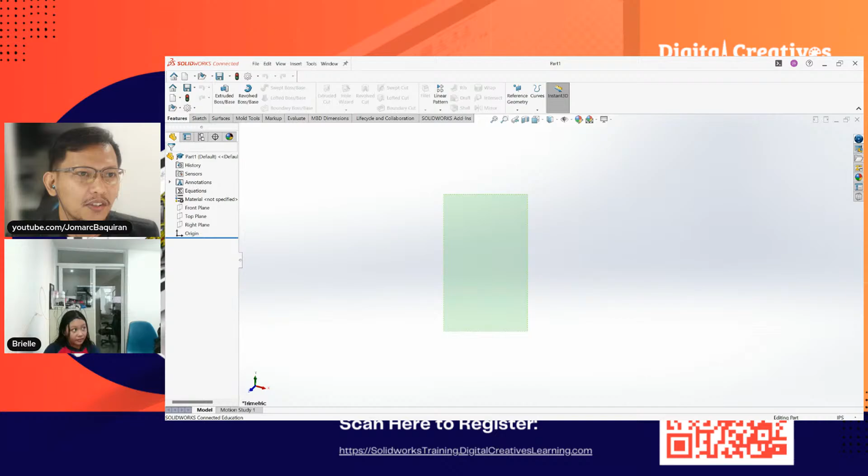And the first model that we are going to do is, so let's warm things up. In addition, I have here Brielle with me, an 11-year-old who is also learning SolidWorks. Oh, I can see Brielle's screen. So this is Brielle's screen. Okay, and the first challenge, flashing over the screen, is this. And suggesting you use millimeter or inch, IPS, inch pound second units.

Okay, as a recap, I'm going to hit Control and double click on part. Yes. I cannot see the dimensions. Once more, showing you the challenge. I forgot the mic is on. Okay, so to change the units, simply head to the lower right. So from here, MMGS, changing this to IPS, inch pound second.

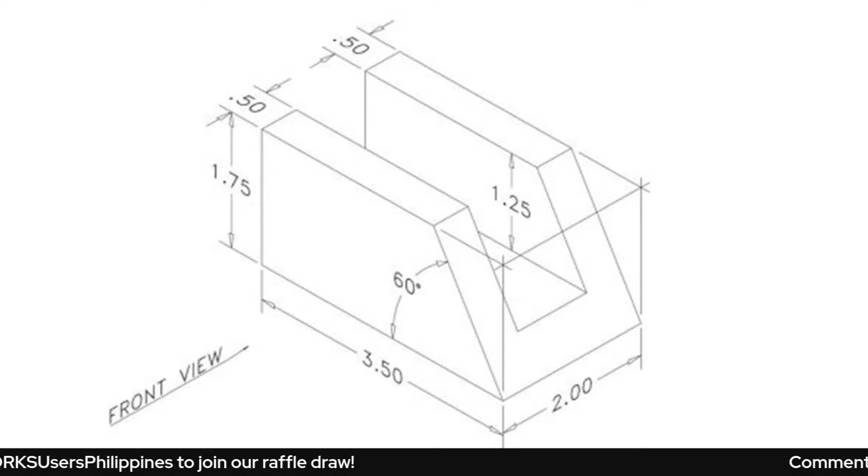Let's see what Brielle's been up to. Okay. So my interpretation on this would be hitting L again for line, selecting front plane. And again, with regards to our definition of sketching, it's rapidly drawing something. So I'm gonna quickly draw this form. Okay. So again, flashing the challenge, requesting everyone to follow along.

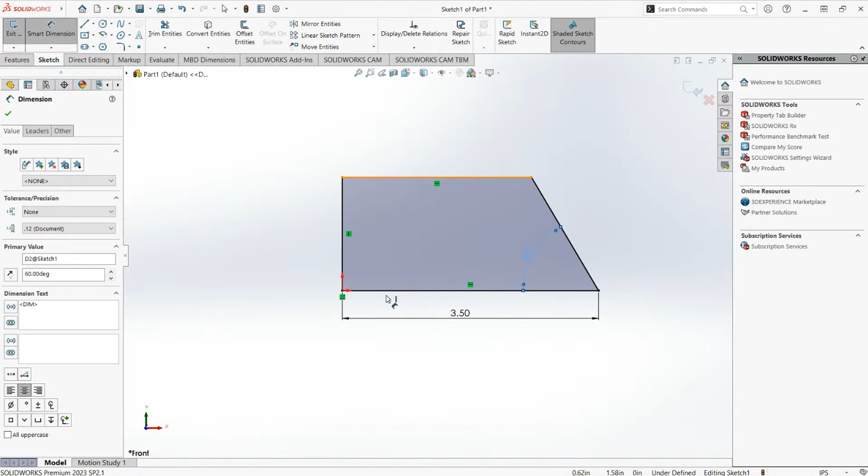Okay, so we're just warming things up. Later, we will be having, I guess, a much more complicated part. Oh, Brielle is already done. So again, it's completely black, which means this is fully defined. Exiting out of the sketch. I have selected extrude boss base, contour selected, and of course, again, make it a habit of making things symmetrical, so changing the direction to mid plane.

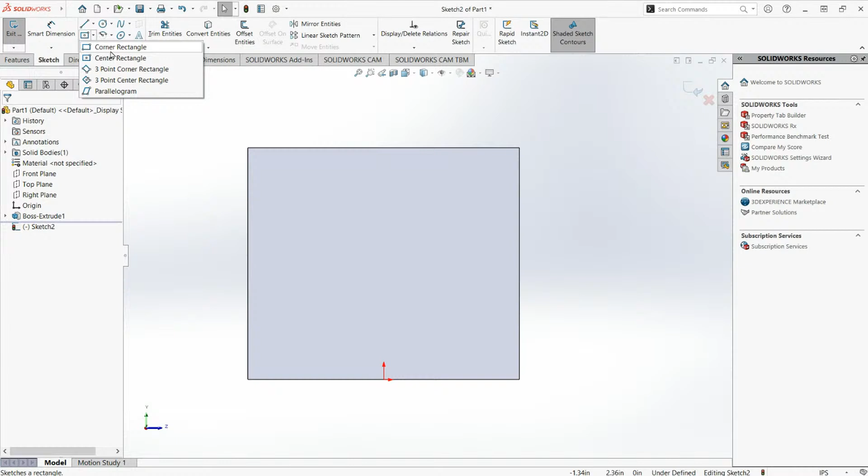Okay. Typing in, revolving our model, selecting this face. I'm going to sketch on this face. So bringing in our rectangle tool, specifically corner rectangle. Left click here, left click, hit S, and grab our smart dimension. Selecting these two vertical lines, it's 0.5. Selecting these two as well.

And notice right now, this dialog box is currently highlighted. So if this is the case, I can select the other dimension, 0.5, indicating that both of them should be equal. Okay, and finally, placing in our 1.25. Exiting out of the sketch, selecting this edge again, confirm under my lower right it's 1.75.

Heading over to features, selecting extruded cut. Okay, and again for the direction, I prefer through all, and hit the green check mark. Okay, so that's how we can quickly create this first part modeling challenge. Very simple, right? Very simple for Brielle as well. This is her work.

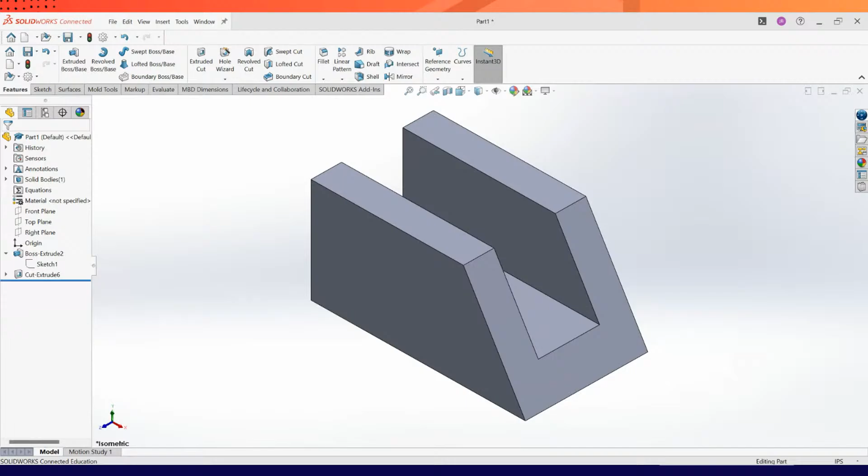Okay, next challenge. So the next challenge would be this one. So this time the units are in millimeter, gram, second.

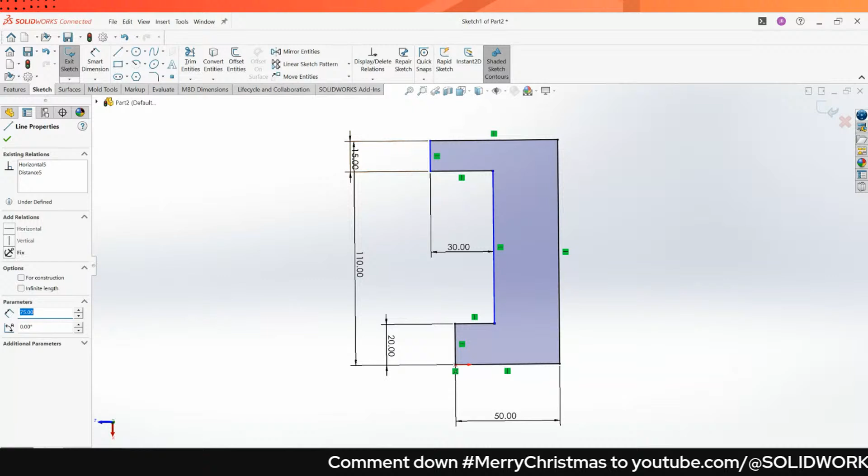Okay, checking Brielle's work. So for Brielle, she needs to add, of course, the rest of the dimensions. So A is 110. And I'm seeing, yeah, that's a good practice. Always move the entities to check what needs to be applied. Is it a relation or a dimension? So move it again, Brielle.

So from here, I'm seeing you should apply collinear. Okay, so you got it now. So exit out of the sketch. The height B is 60. Control 7, isometric view.

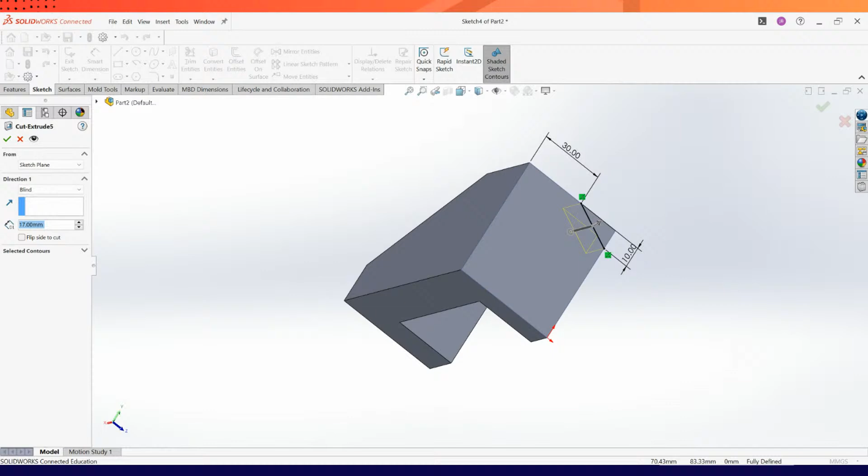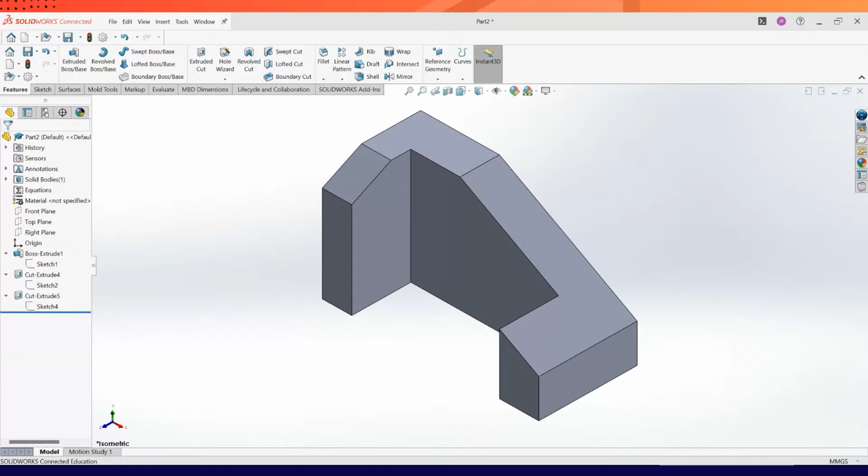So next, for our third challenge, how about this one? Oh my god, what is that? Okay, so control N. So let's assume this is also in inch, pound, second. Where do I start from? I don't know. Of course, what I will do for this is I'll be creating this profile. So my turn, control N. So changing this again to inch, pound, second.

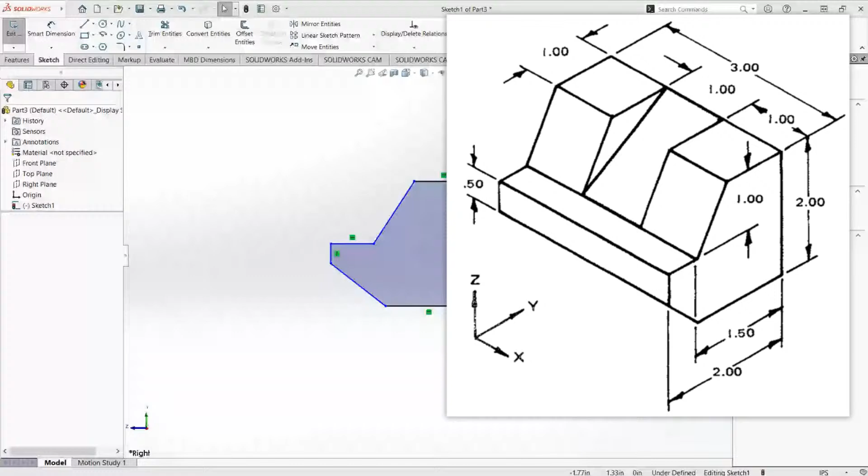So checking Brielle's work. Yep, I think she nailed it. I think for mine, these two points should be aligned vertically, right? To 1.5.

Okay, Brielle has a question. It's actually this one should be 0.5. It's not a sharp... Oh, okay, like what you did. Never mind then. I need this. How about yours?

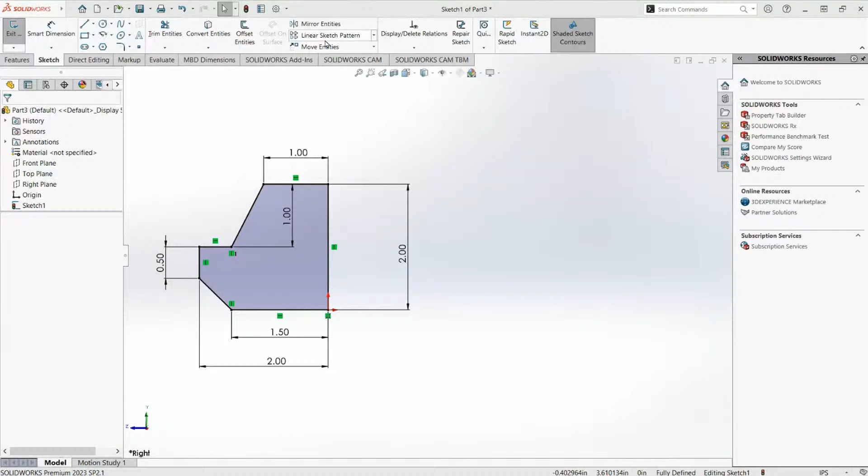Yeah, so if you can see my work, this one, Brielle, these 2 points, I aligned them to 1.5. So I selected the 2 points.

So Brielle's done. So it's 3. So for the direction, again, our practice, making things symmetrical. So mid-plane. Did you extrude that mid-plane? I did not extrude it. You should extrude. So go back to boss extrude. No, boss extrude. Right click. Cancel that. Yeah, mid-plane. The direction. And then type in 3.

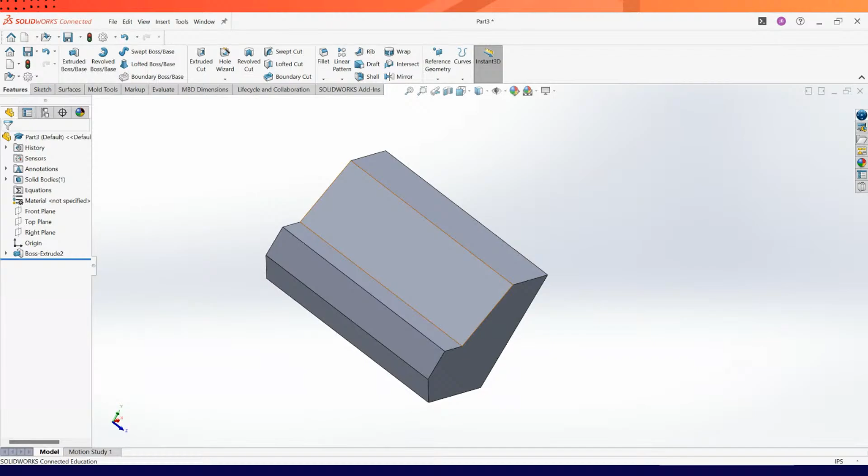Okay, to check if you actually select the edge, Brielle. Any edge. Edge, not that. To determine if it's 3. There. Okay. What does it say? 3. Okay. So let me catch up with Brielle. Again, direction, mid-plane. 3. Of course, the next challenge is how do you create the cut extrusion at the middle?

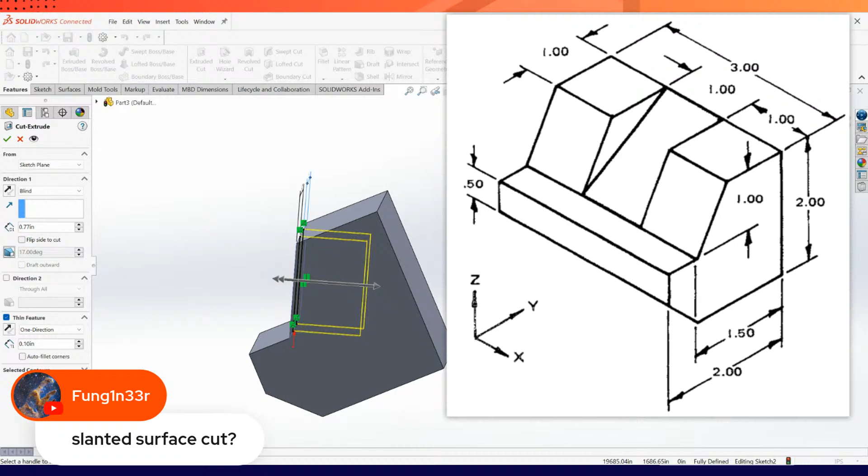Is anyone done from our participants? I'm seeing Brielle is doing, yeah. Brielle is having difficulty. No, I'm not. From Fungineer, is it a slanted surface cut? No, it is. Me. Oh yeah, this is coming from an 11-year-old. Okay. Help me. Oh, Brielle is asking support from our audience.

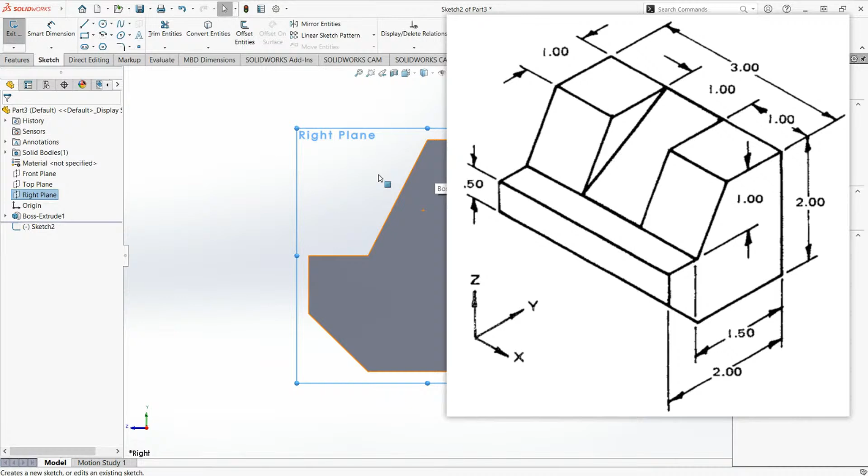So for my interpretation, I'll be sketching the profile or the contour for that cut extrusion. I'll be selecting right plane. Okay, sketching on right plane. So with right plane, I'm going to convert entities. I'm going to create a line from this point all the way here. Actually, no need to convert.

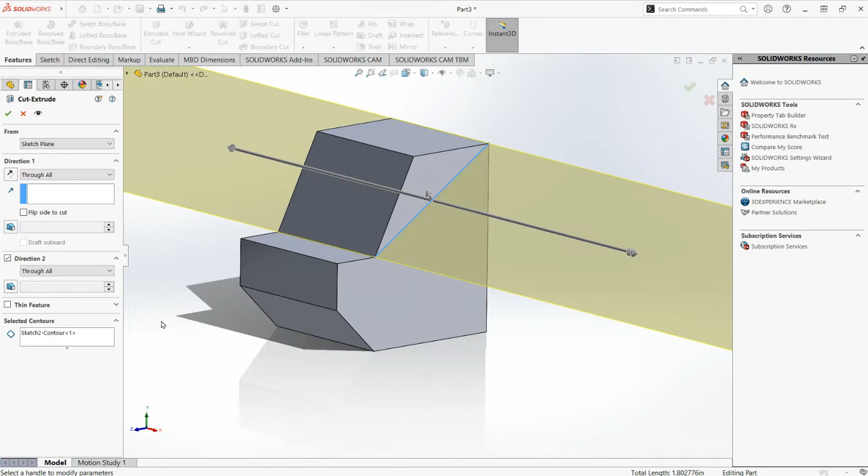So if you want to see the section view, head up here, up in the middle, section view. But of course, you need to select the appropriate plane. So right plane, section view. And of course, from here, we can do the extruded cut. How do you do that? So like what you did previously, I created a diagonal line. This one. And of course, or simply convert the entities.

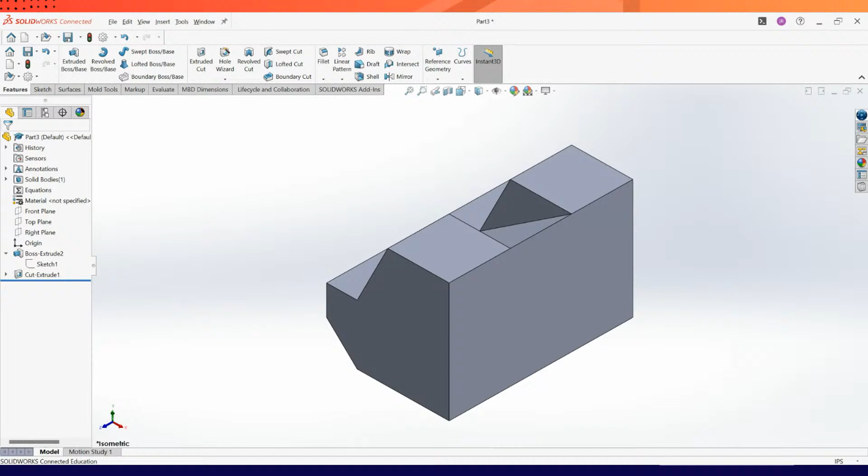Kindly remove the section view. Okay, got it. I think I may have the wrong. Home view, please. Okay. Control 7, home view. Okay, if that is the case, Brielle, how do you make it the same orientation when we view the drawing? It should be like this, right? So again, it will be changing the plane where you sketch on. What if you do Control 7? Yeah, you should have sketched on the right plane.

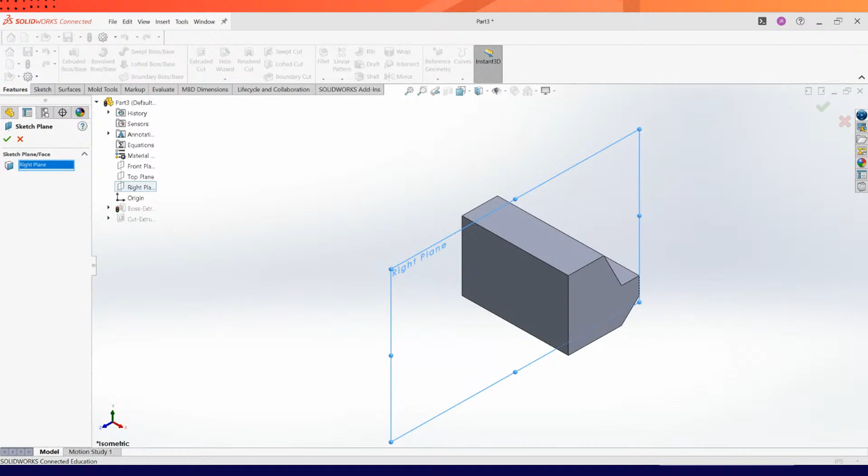So head over, change the plane, go to sketch 1, edit sketch plane. And then, of course, deselect that, select the front. It should be right. Let's check. What does it say? Continue and ignore. Oh, you have to redo.

Anyways, guys, it's just simple. If that occurs, like for mine, so this is my model, removing the section view, of course. So I can, again, edit sketch plane if I prefer this one to be showing, let's say, on the front. Of course, we need to make the necessary adjustments. So got it, Brielle?

Okay, let's now move on to our next exercise, making things more difficult, as they say. But hoping this is a piece of cake for Brielle too, so showing the next challenge. Okay, challenging everyone to create this model. How dare. Yeah, let's view Brielle's screen.

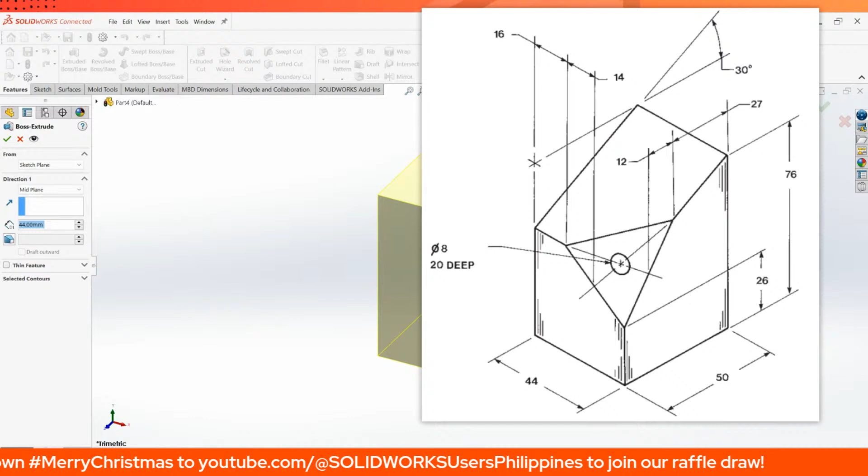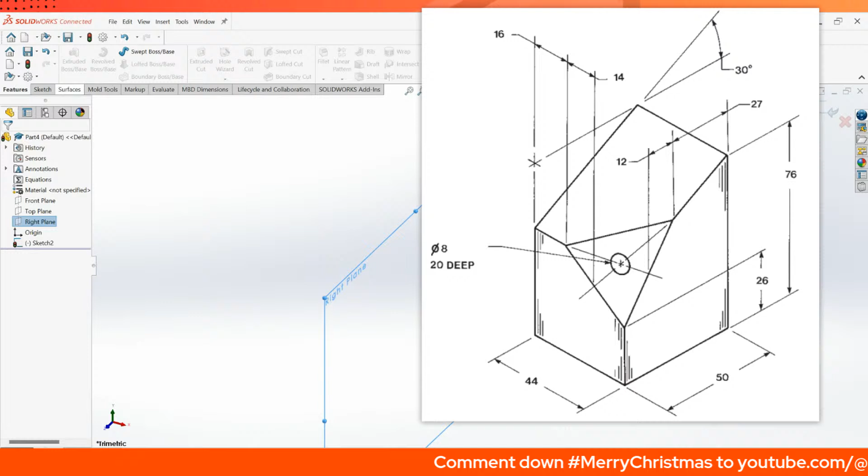Yeah, for this Brielle, I think you should have created the diagonal cut through the sketch right away instead of creating a rectangular extrusion. Yeah, my suggestion for you, Brielle, is to quickly create this type of profile right away. Okay? This is proving to be challenging for 11-year-olds. So it has an angle actually, right? So 30.

I'm gonna grab a quick coffee.

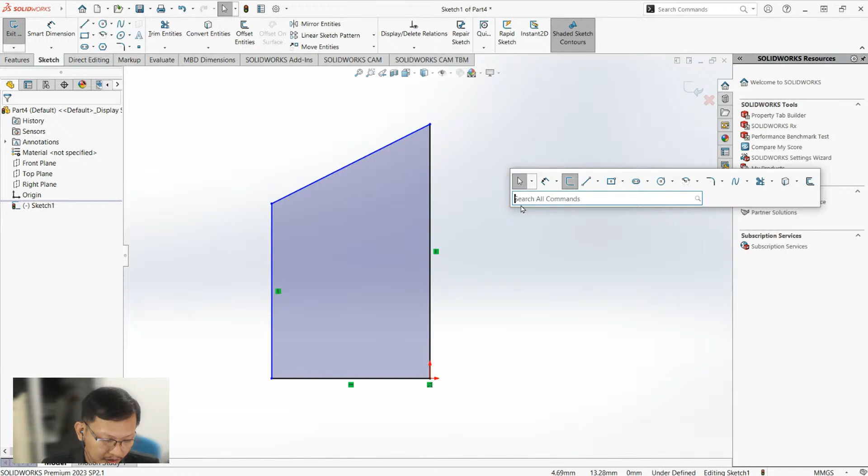Okay, so let me share my screen. All right, so for this challenge, let's first create this section. So this is 76. Are you done with this, Brielle? Yes. So 76. This one to be 50 to 50. And there's an angle here, right?

I'll probably be creating a line here, convert to construction, place a dimension. So it says 30. So this should be 30. 30. So are you done with this as well?

Brielle is showing me another technique, how to add the dimensions. So Brielle, how did you do it? Where did you get that arrow type? From the dimension. Okay. Then,

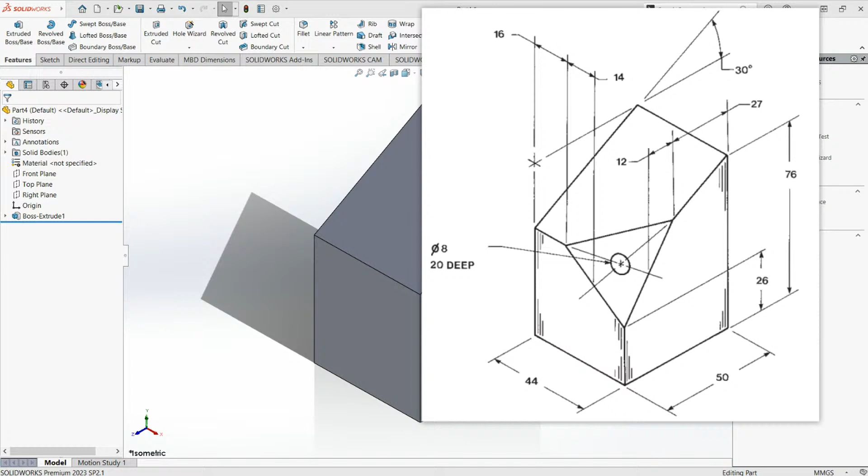Okay, so for the first one, let's define, I'm seeing the 16 and 14. So I'm going to select this face. I'm going to sketch and head up, selecting point. Again, head up, upper left, point. I'm going to drop a point on this edge. Okay? And it says here on our challenge, 16. So grabbing our smart dimension, dimensioning this point to be 16.

So next, I can also add the 26 as well while in sketch mode. So grabbing point once more, point, dropping the point this time on this edge, grabbing smart dimension. Let's define this as 26. Then of course we have another point defined by 27.

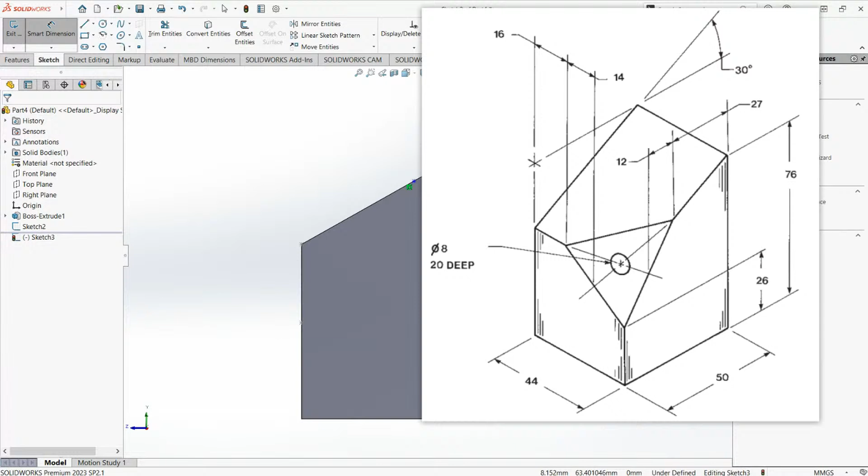So I'm going to exit out of this sketch, select this face. Okay. Grab the point tool, upper left, drop this on this edge, diagonal edge, and define this to be 27. Again here, 27.

So going back, exit out of the sketch, isometric view. So I have now created those 3 points, right? So what should be the next step? Again, showing you the challenge.

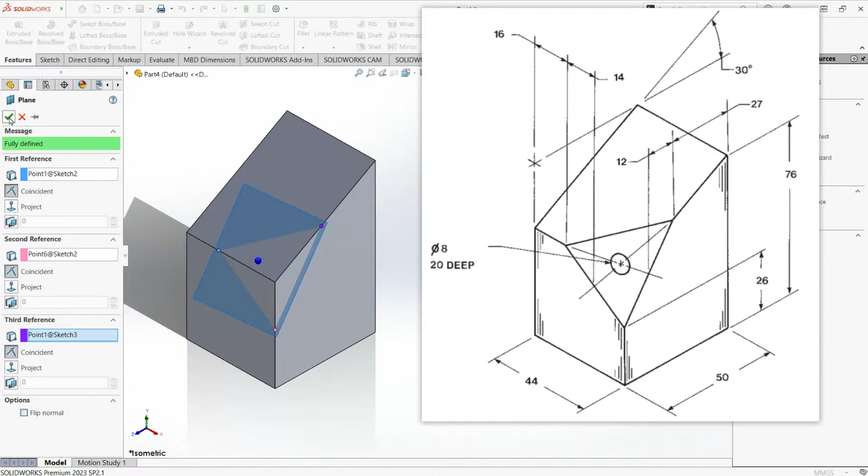Okay, so with the 3 points created, I'm gonna head up again, this time at the upper center, under reference geometry. I'm gonna be selecting plane. So it asks on the left, take note, first reference is currently highlighted, asking us what's our first reference. So I prefer this point. Second reference highlighted, this point. Third reference to be this point. Okay, selecting the green check mark. So we now have created a plane based on 3 points.

Okay, and from these 3 points, next thing I'm going to do is slicing this up using that plane. So head over under the tabs, direct editing. If it's not visible, head anywhere to a blank space. So here I'm in the blank space here on our ribbon. Right click under tabs. I enabled direct editing. So with direct editing, I'm going to be selecting split.

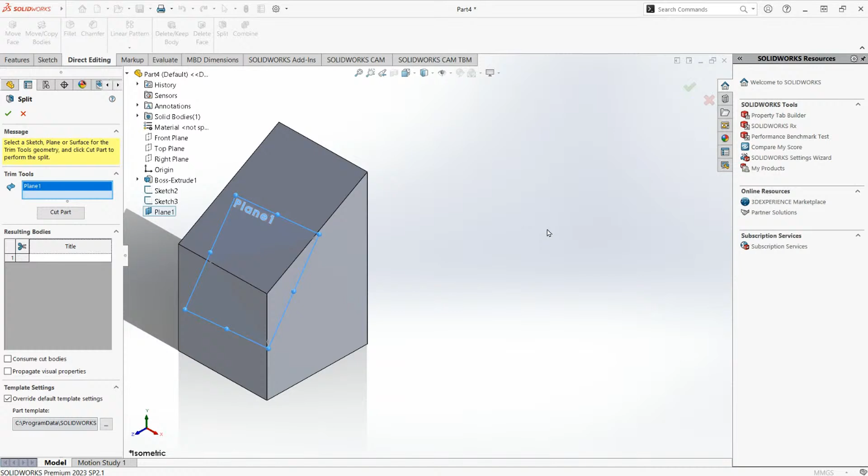So for the trim tool, definitely our trim tool is the plane that we have created. Okay, and selecting cut part. So selecting these check marks, I just prefer to have those bodies existing and not removing them. So checking those check boxes, selecting the green check mark, and notice right now, from a single solid body, we now have 2 bodies.

So for the target body to be removed, I just prefer, for the sake of this lesson, to turn off its visibility. But of course, we can always delete that. Okay, so with the chunk on the edge removed, let's now create again the sketch reference for us to create that circle.

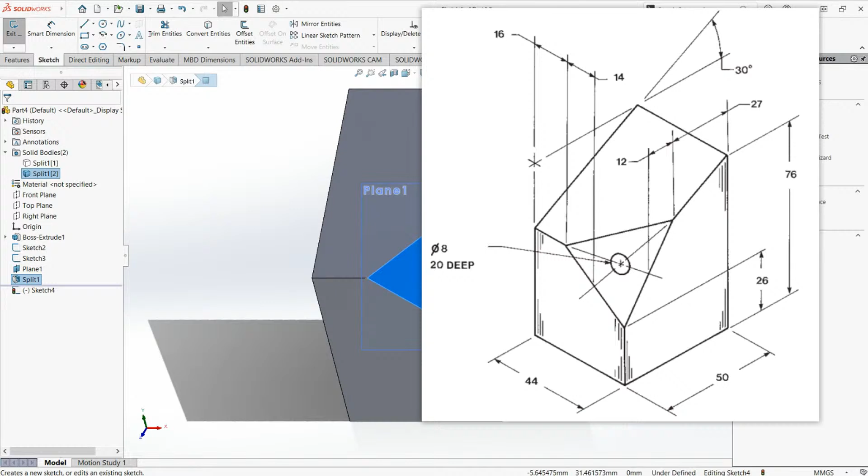So I'm seeing those projected lines projected to the midpoint of the edges to create that circle. So let's now select this face, sketch. I'm going to be creating a line, grabbing line from this point to this midpoint. When you hover over this edge and search for that midpoint, of course it will appear and gets highlighted. So like this one, the orange one, left click. So it's black, which means it's fully defined.

So selecting this line, turning this into a construction geometry. L once more. From this point all the way up to this midpoint, turning this into a construction geometry. So from here, we can now grab our circle tool, dropping my circle here, selecting the center point and this line, selecting coincident, hitting S, selecting smart dimension. The diameter is 8. Okay, so with this now defined, we can now create a cut extrusion with a depth of 20.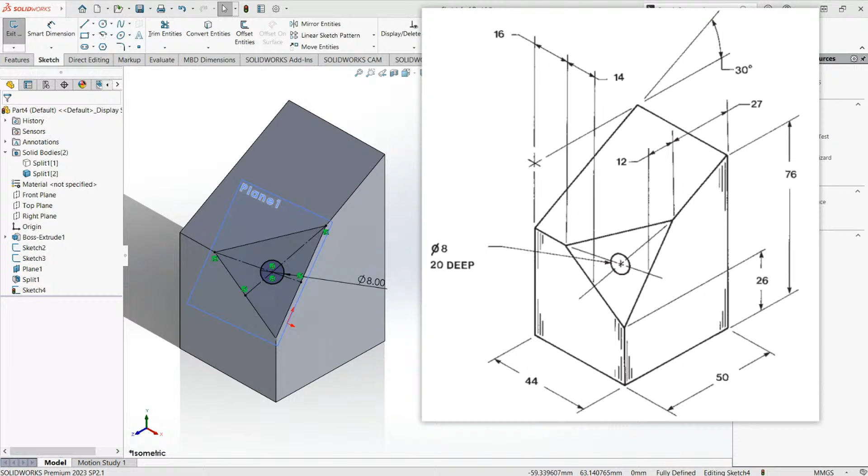Okay, so let's wait for Brielle to finish the task, and for this part modeling training, I would like to leave you with this final challenge. Leaving you this final challenge, and in preparation, please screen capture this. So this time, this one is using convert entities.

Okay, last challenge for the day, Control N. Selecting part. And selecting millimeter gram second. So for me, sketching on the top plane, grabbing circle, diameter for this circle to be 58.

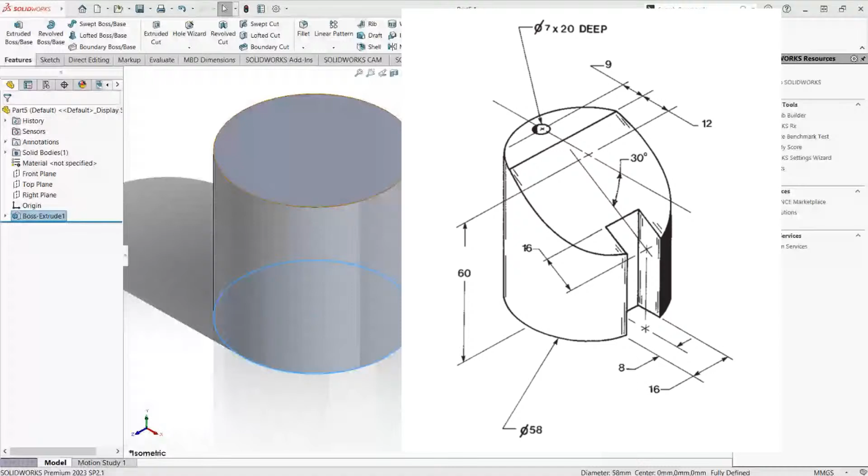So for this, I'm going to sketch on the top of this cylinder. So L for line, creating a sketch from a line from here to here. Of course, making this vertical. Again, relation, vertical, smart dimension, dimensioning this line and our origin. It says on our drawing it has a distance of 12. So with 12,

I'm going to create another sketch, this time on the front plane. And probably create a section view on the front plane. And this time creating a line, again, sketching on the front plane, creating a line from this point.

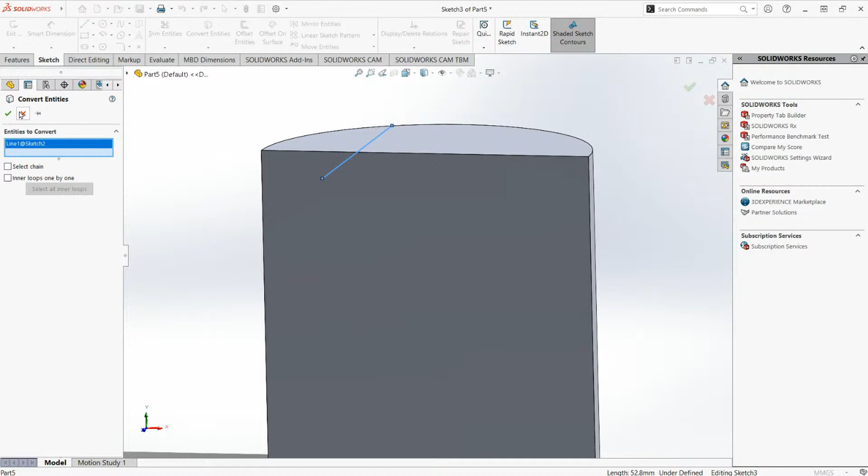But of course, we need to convert this into an entity because our line doesn't attach to that point. So selecting convert entities. Let's convert this entity. Or if not, so we really need to convert this as an entity.

Yes? Let me. Yep, so checking Brielle's work. She has already created that diagonal line.

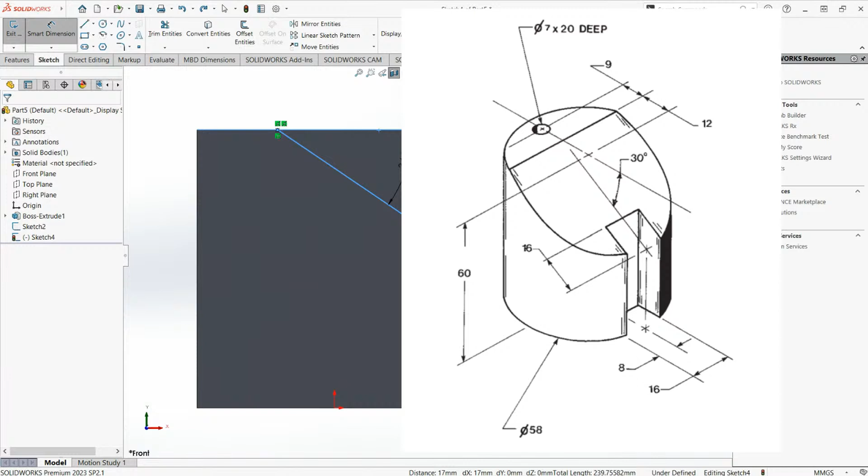And of course, same. We have to convert entities. So for this edge, so showing Brielle's screen. How do you convert this, Brielle?

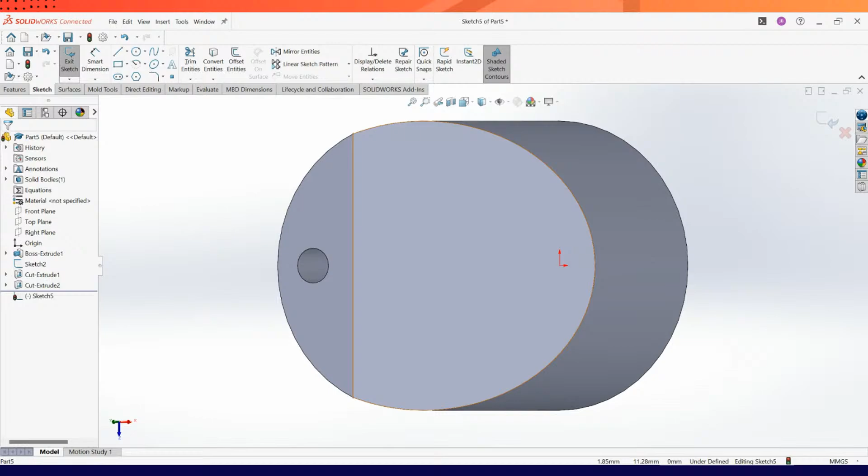So of course, with this line connected, again, let me just repeat. You need to go to normal view. So let me delete this line. Control 8 for normal view, creating that line again from this projected point up to this edge. So notice the coincident relation was automatically applied, applying the dimension, which is 30.

So next, with that diagonal line created, we may now proceed to extruded cut. So selecting this line and the direction, I want you to select through all both. Selecting the green check mark once more, through all both. Okay, next step would be sketching on this plane. I want you to sketch on this plane with that 16 dimension, the dimension having a value of 16.

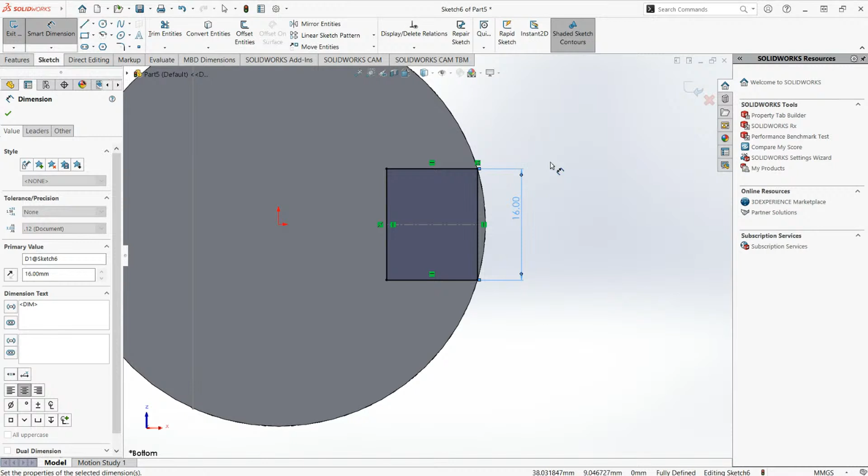And I want this endpoint of that previous sketch aligned midpoint. The relation with this line and this point to be midpoint. And of course, from here, we can now add the dimension having a value of 16. Okay.

So again, guys, when I have created that rectangle, I also utilize convert entities to convert this arc for us to make this as a contour or profile. So let's check Brielle's work.

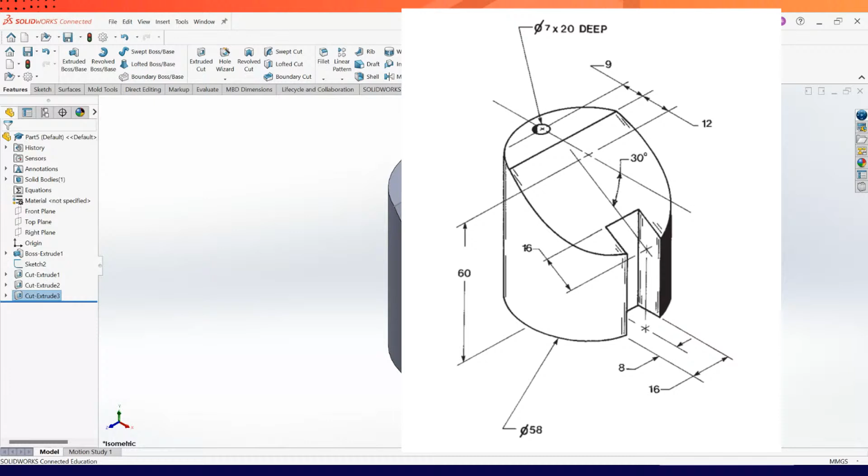Okay, going back to my screen. So again, with this as a profile or contours, from here we can now create a cut extrusion. So selecting extruded cut, selecting sketch 6. So those contours are this rectangle and this piece of segment. And for direction, I prefer through all. And of course, leaving the rest to you, like creating the hole on top of this face.

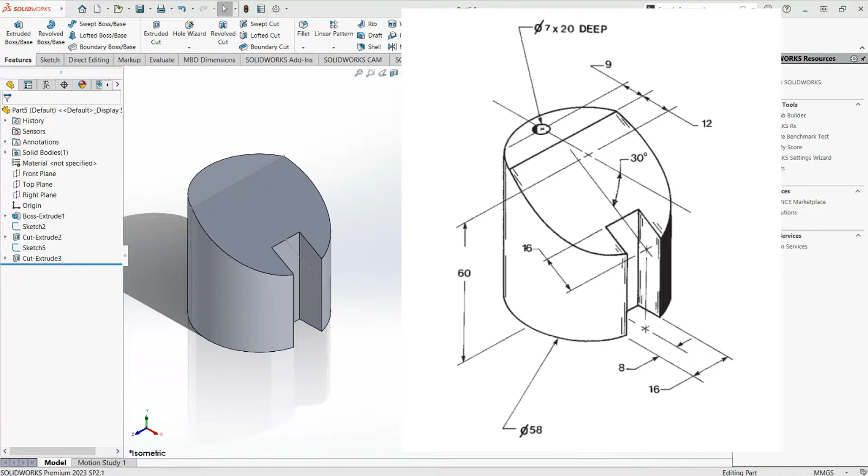Okay, and for our final assignment, I want you to screen capture this. But this time, instead of the special request for this challenge, which I'm gonna be leaving to you, I want you to sketch this out on a single part like this. Again, this is in preparation for our assembly class. I want you to sketch this out like this. Your assignment. I want you to sketch this out in a single sketch.

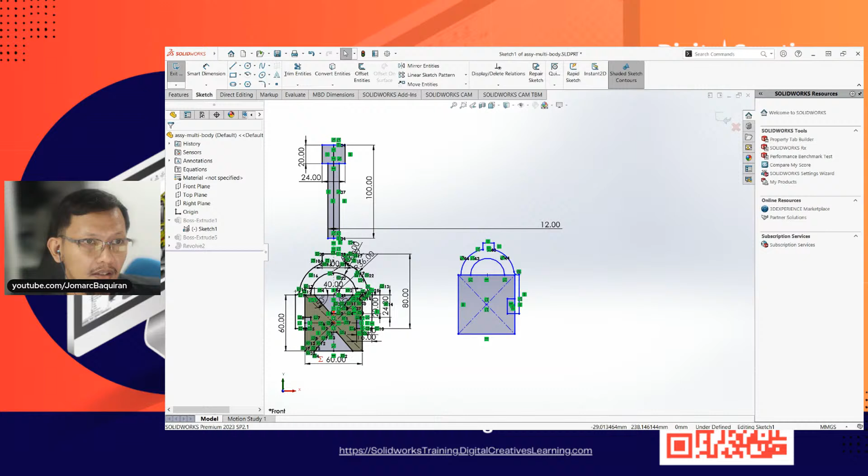So take note again, this 3-part assembly was all made in one sketch. So ito po yung assignment. So this will be the assignment that I'll be requesting from you guys. This is in connection to tomorrow's assembly modeling. So again, requesting everyone to sketch this out in a single sketch. So this is actually a part. Notice guys, up above, this is an SLDPRT. This is a part file. Again, the request, assignment, homework, sketch this out on a single sketch.

Okay, please screen capture this.

You have things to make, from the practical to the incredible. Imagining the biggest ideas right down to the tiniest details, you make real things for the real world. We have the design solutions to make them happen, bringing your visions to life, quickly, easily, accurately, wherever and whenever inspiration strikes. SolidWorks was built by engineers and designers, for engineers and designers, a global but close-knit community of learners, teachers, doers, and makers who care about camaraderie as much as we care about technology, and we care a lot. But turning the hypothetical into the physical is a team sport. That's why we're consistently enhancing our software based on your direct feedback, infusing it with the latest technology, and increasing its capabilities to meet your specific needs.

For more than 30 years, we've been evolving with you, making product development more accessible, scalable, sustainable, enjoyable, investing in the future, your future, with cloud technologies, real-time collaboration, artificial intelligence, and beyond. And we're just getting started. SolidWorks is everywhere. Whoever you are, whatever you need, we've got it covered. You make the future, we help make it possible.

Get the SolidWorks you love and so much more as part of the 3D Experience SolidWorks for Students offer. These are the best design tools used by industry that you can use now for your assignments, your projects, and building the job skills needed for your career. 3D Experience SolidWorks installs on your computer. Rest easy knowing that your SolidWorks designs are securely saved in the cloud, and connect to browser-based CAD design tools that can be used anywhere on any device. Along with online training, certification, and a global student community, 3D Experience SolidWorks for Students will give you the experience with the best CAD software on the planet.